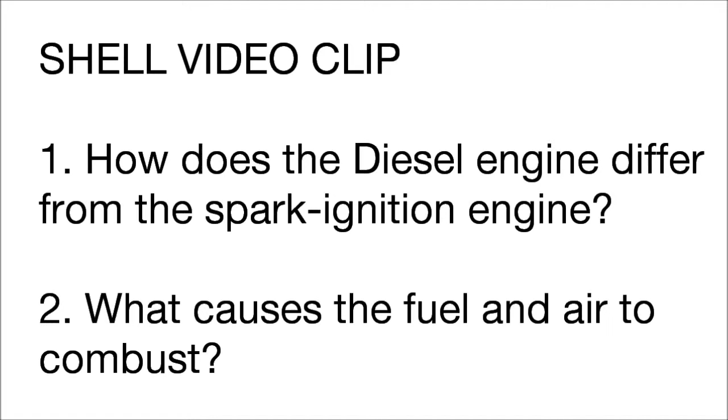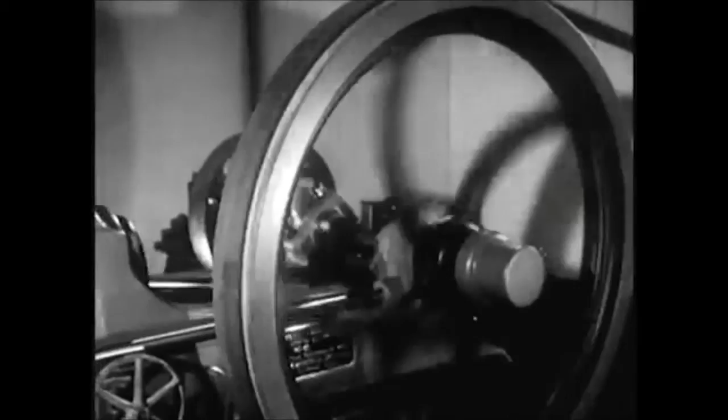The 19th century saw enormous progress in the development of heat engines of all kinds, and towards its close, there were four main types in general use. The oil engine with hot bulb vaporizer, the steam engine, which was still considered supreme for a wide variety of uses, the gas engine for stationary power plants, and the rapidly improving gasoline engine. All these engines worked on the same basic principle of turning heat into work. But in each case, the amount of heat turned into work was small. The efficiency was low.

6% for the average steam engine. 10% for the oil engine. 17% for the gas engine. And 12% for the gasoline engine. Looking at these facts, Rudolf Diesel was certain that it should be possible to build an engine with a very much higher efficiency. From the start, he was convinced of four things. He must get away from the steam engine entirely. Combustion must take place inside the cylinder. Air, not steam, must be the working medium. And finally, the air must be highly compressed so as to permit the greatest possible expansion.

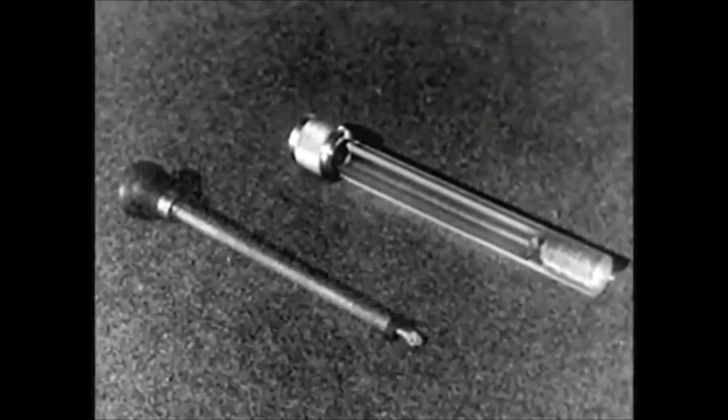He remembered the pneumatic match, or fire piston. A small cylinder, usually made of wood or glass, into which a closely fitting piston or plunger could be inserted. The head of the piston was recessed so as to hold a piece of dry tinder. When the air in the cylinder was highly compressed, it became so hot as to cause the tinder to ignite. The fire piston gave a clue to a practical means of securing combustion inside the cylinder. Compression, ignition. Diesel adapted this principle to the internal combustion engine and described the cycle for the first time in 1892.

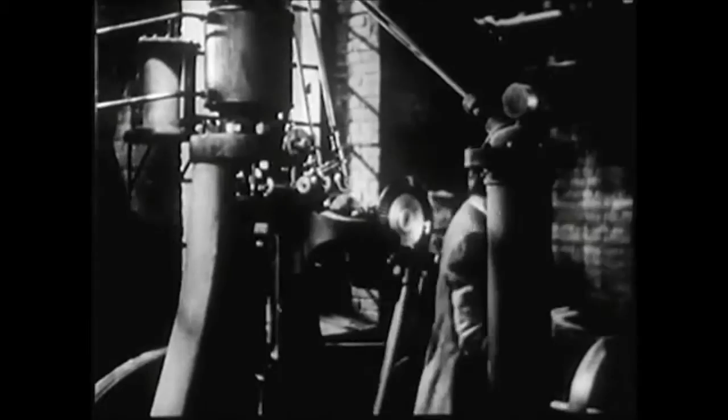A downward stroke of the piston. Pure air is sucked into the cylinder. The air is then compressed to the point where it reaches the temperature necessary for combustion. Fuel is introduced into the compressed air. Owing to the high temperature, it takes fire and produces heat, which is turned into work. During the fourth stroke, the spent gases are forced out of the cylinder. By 1894, a completely new and redesigned engine had been built, and preparations were complete for the first trial run.

Ignition was a practical way of securing combustion, and an engine could be made to work on this cycle. By 1897, the first reliable engine had completed its tests. Limitations in engineering methods had made some modifications necessary. Nevertheless, the engine had an efficiency of 27%, far higher than any other engine of the day.

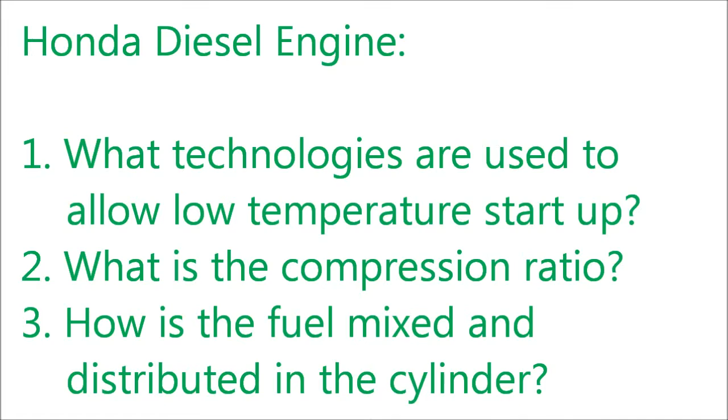Three questions as we watch this video. First one is, what technology is used to allow the engine to start up in low temperatures? Second question is, what compression ratios do we see in a diesel engine, and how do these compare to the spark ignition engines we looked at last week? The third question is, how do we ensure that the fuel and air are mixed together in the combustion chamber?

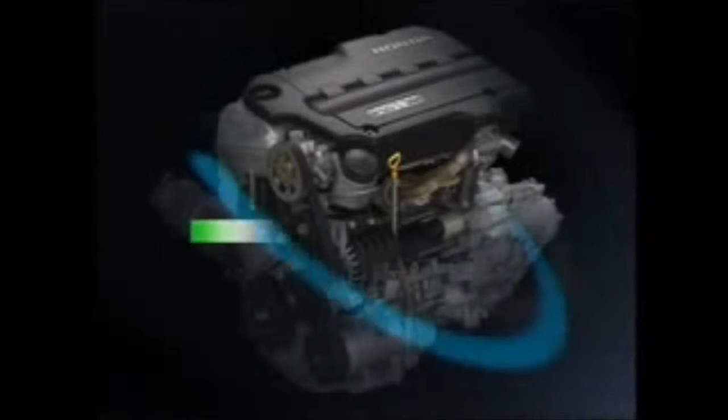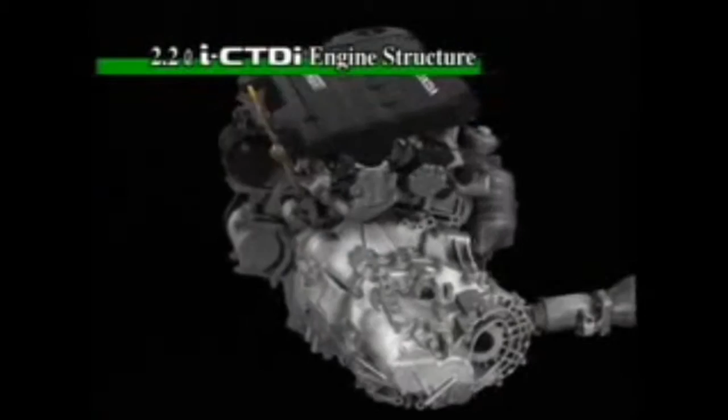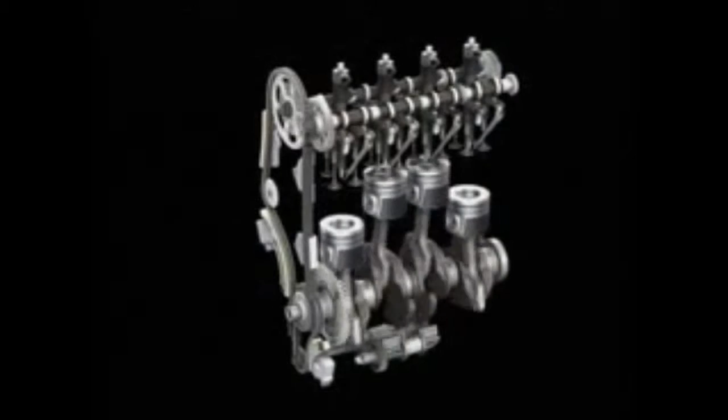Honda's new diesel engine, the 2.2-litre i-CTDi, applies advanced intelligent combustion control, adjusting engine speed and load to obtain optimum combustion under all driving conditions. The i-CTDi delivers outstanding performance in fuel economy, low emissions, output, torque and quiet operation. The new engine combines a newly redesigned combustion chamber and variable intake swirl to ensure broad diffusion of the injected fuel. The optimized shape of the combustion chamber's cavities and lips helps disperse the fuel vertically, while the swirl created on the intake stroke promotes horizontal dispersion. Fuel is efficiently spread throughout the combustion chamber.

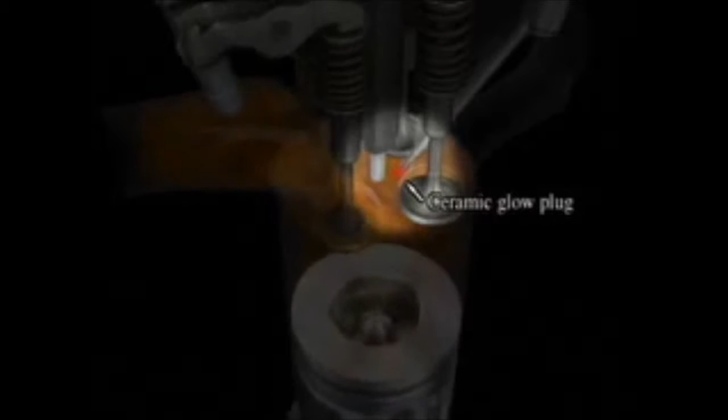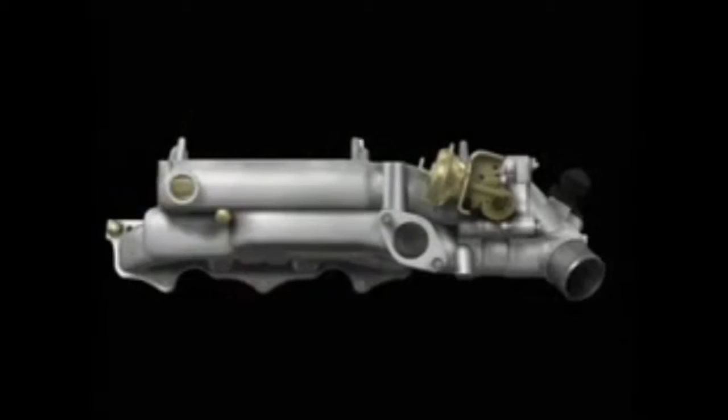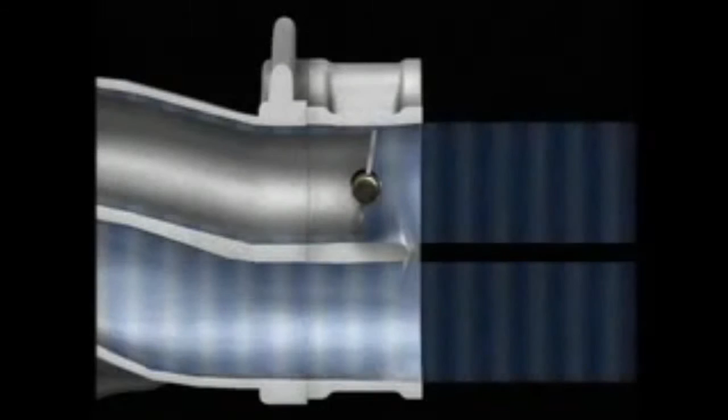Further, a ceramic glow plug and other innovations greatly improve low-temperature combustion stability, permitting the use of a low compression ratio of 16.7 to 1. Appropriate moderation of the combustion pressure reduces friction, vibration and noise. Honda has also adapted a number of other leading-edge technologies to achieve advanced combustion control. The i-CTDi is fitted with a continuously variable swirl control valve at the intake manifold chamber to provide smoothly graded control over the swirl ratio. In situations where a high swirl is called for, a valve closes to limit the volume of air intake in the secondary port. This difference in the intake volume between the two ports generates a high swirl in the cylinder.

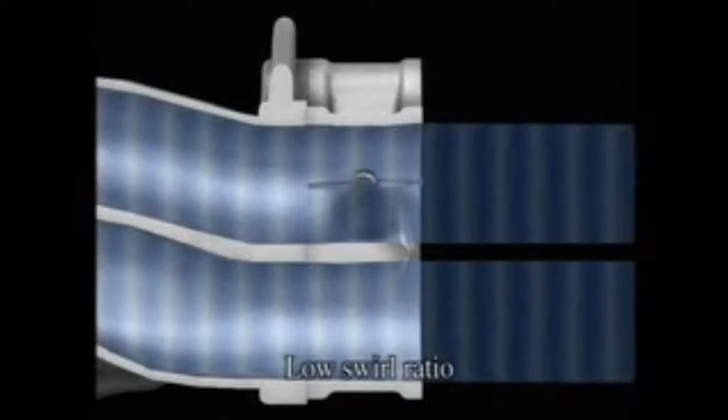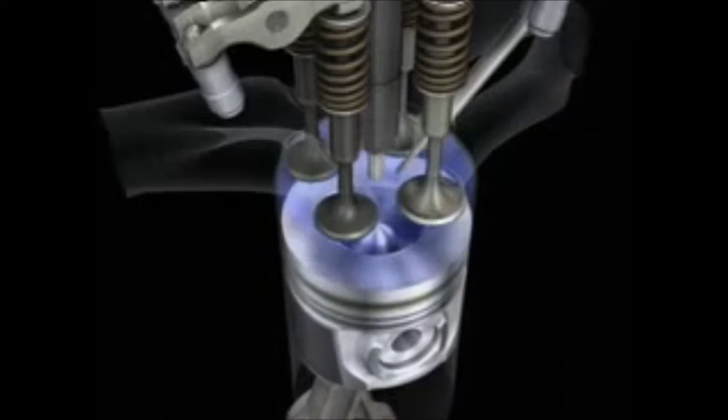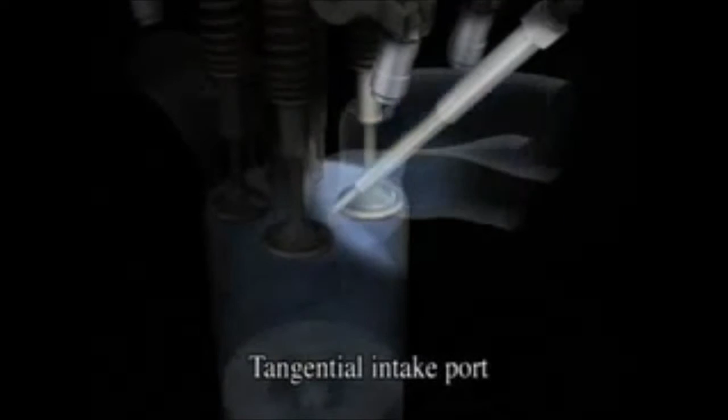Under conditions where a low swirl ratio is more appropriate, the valve opens wide, reducing the difference in intake volume between the two ports to lower the swirl ratio. The continuously variable swirl control valve thus ensures optimum matching of swirl ratio with engine speed and load, significantly contributing to fuel economy. Another innovation that ensures lower intake resistance and aids in more efficient swirl generation is the tangential intake port.

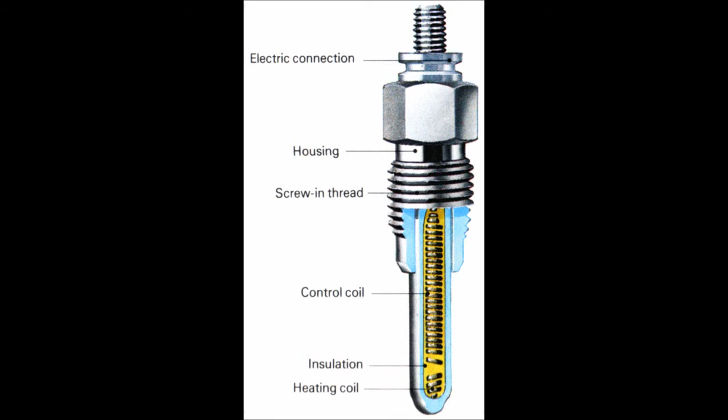We heard about glow plugs in that video. Glow plugs are used to start up in cold temperatures, so the glow plug will heat up the air before the intake so that the engine can still start up when it's minus 20 degrees outside.

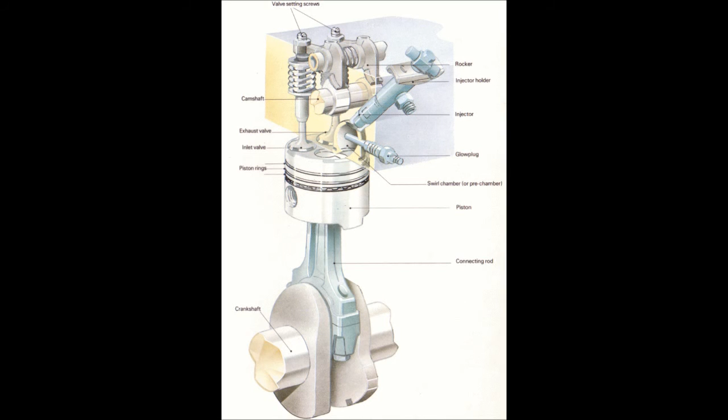We heard that diesel engines have much higher compression ratios than a spark ignition engine. This is why a diesel engine is much more efficient than a gasoline engine typically. Because diesel burns slower, and because we have direct fuel injection, that means we don't have to worry about engine knocking the same way we do in a gasoline engine.